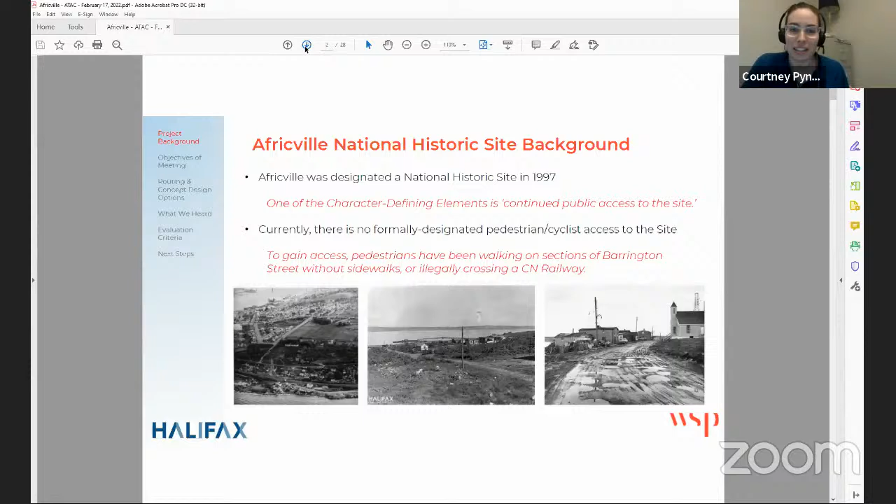How this project began was that it was initiated by an accessibility petition brought on by the Africville Museum. This petition recognized that there are currently no formal pedestrian facilities that connect the National Historic Site to the HRM sidewalk and the Halifax Transit Network. So this brought on the project by HRM, and they pulled us in to help out with the functional plan.

So what was our project, or what is our project? We were asked to look at connections to the Africville National Historic Site, broken down into 3 project phases. The first phase was to review the 3 proposed potential routes identified by HRM. We then determined the preferred route based on those 3, looking at the AAA lens—all ages and abilities—and its accessibility. And the stage we're currently in right now is preparing the functional design for the preferred facility.

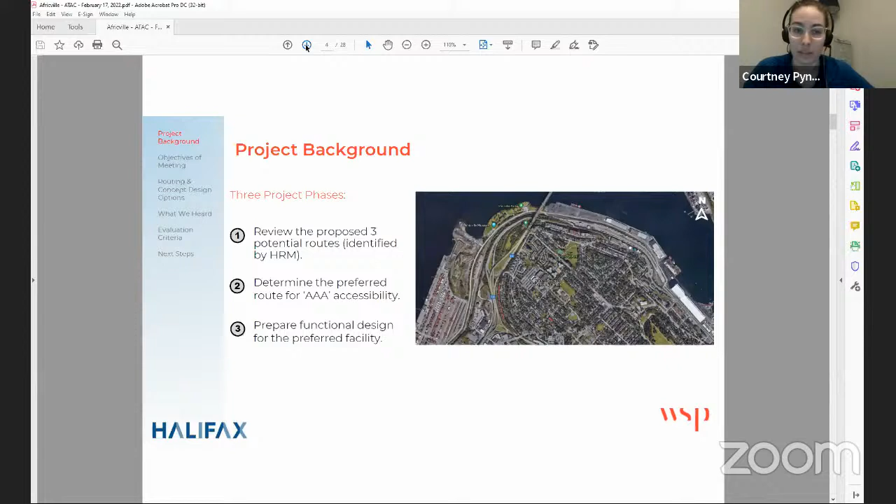So what we did is reconvene in December of 2020. Of course, we re-met with those external stakeholders, utilities, and property owners just to ensure we were up to date with any of their ongoing projects or information. So we really kicked the project back off at that point. We were able to complete our review of the existing conditions, develop those concept options, and then went to the public and re-engaged the stakeholder engagement group to gain feedback. We met with some advocacy groups in October, and also completed some community pop-ups and online webinars late October.

Why am I here today? Well, we're here to provide a project update, show and review the public engagement results that were received, get some feedback and comments from the group here today, and also let you know what's next for the project.

Those three routes we talked about before are shown on the screen here through A, B, and C. A is looking to build a connection from Niobe Gate through up to Barrington Street and then down through Africville Road. What we wanted to note here is it's fantastic to extend that connection on Barrington Street down to Niobe Gate.

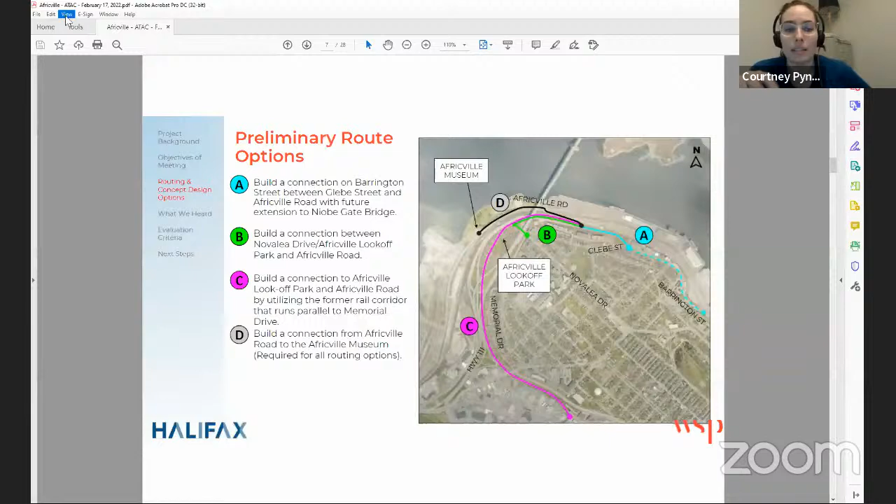Novalea Drive down through to the Africville Lookoff Park and then a connection through Africville Road. The third option, illustrated by C and in pink, is to build a connection to Africville Lookoff Park and Africville Road by utilizing the former railway corridor, which runs parallel currently to Memorial Drive.

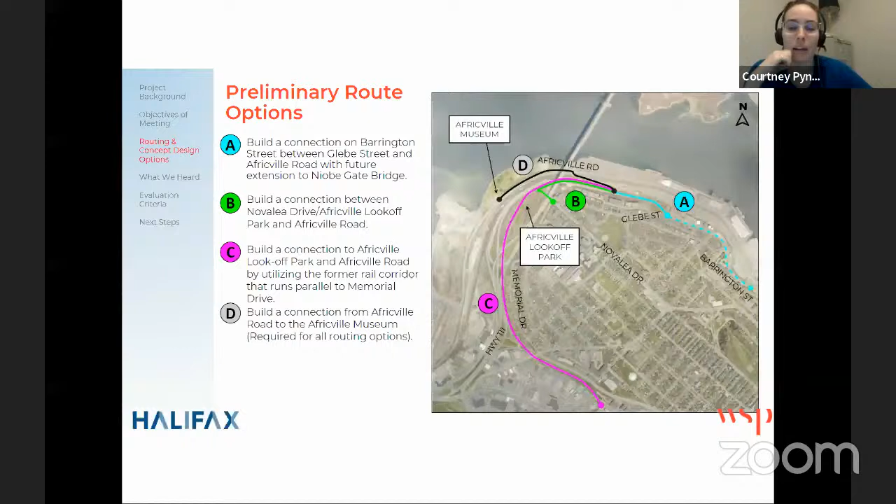One thing to note, D is in black because D is being looked at for all three options. So A, B, and C did include D for all those options. D is looking at building the connection from Africville Road through to the Africville Museum. Again, that was looked at in A, B, and C. It wasn't really a contender for an option—it was kind of guaranteed it was going to happen.

So after completing preliminary feedback from stakeholders, as well as looking at the different options and a general criteria list, we provided a recommended primary route to further look into in regards to design options.

What was selected is A, so that's building a connection on Barrington Street to Glebe with that future extension to Niobe Gate. And of course, Project D, which is building that connection from Africville Road down through to the Africville Museum. Since it's there and it's nearby and there's an opportunity here, we also wanted to flag Project B.

There would be an extension along the existing high track that's currently accessed by the MacKay Bridge—they currently have an access road there for access to their piers and their abutment maintenance. But we thought if that could be updated, it would be a great connection to the bottom of Novalea. One thing to note though, there's a very steep connection there from Novalea Drive down. So it doesn't meet that AAA lens, but it's still a great connection to complete that loop, so we wanted to include that.

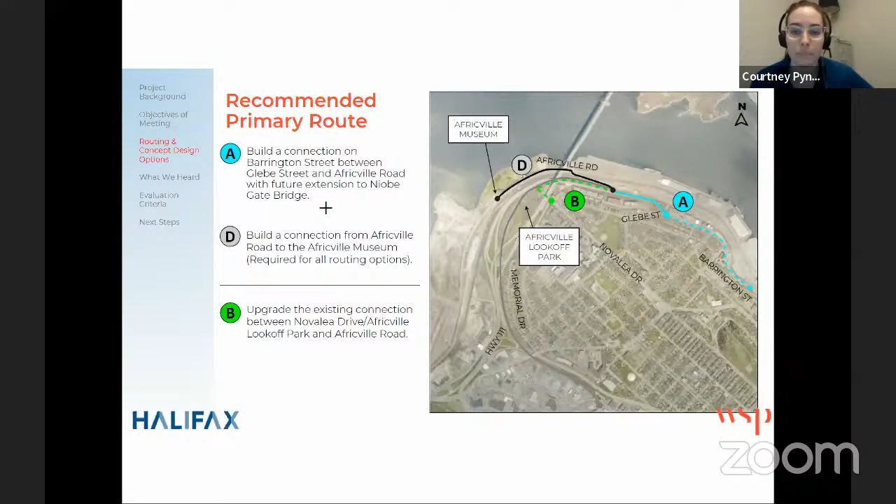Now we're really going to dive into and focus in on that Project A. We've selected Project A and D to further look into.

Now we're going to talk about three different segments here. Segment 1 is mainly focused in the Africville National Historic Site today. Section 2 is pretty much going from the parking lot there at Africville National Historic Site and making our connection up to Africville and Barrington Street. And then section 3 is going from that point at Africville and Barrington through to Barrington at that Niobe Gate location. So we're going to dive into each of these chunks now.

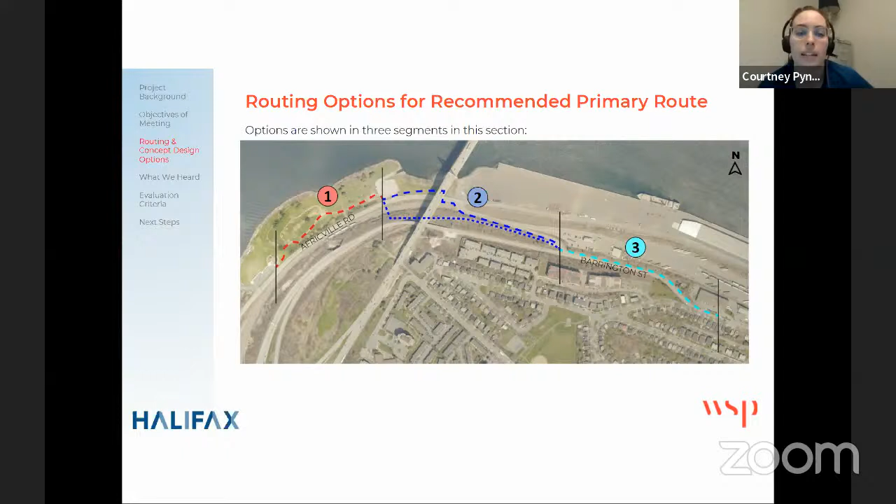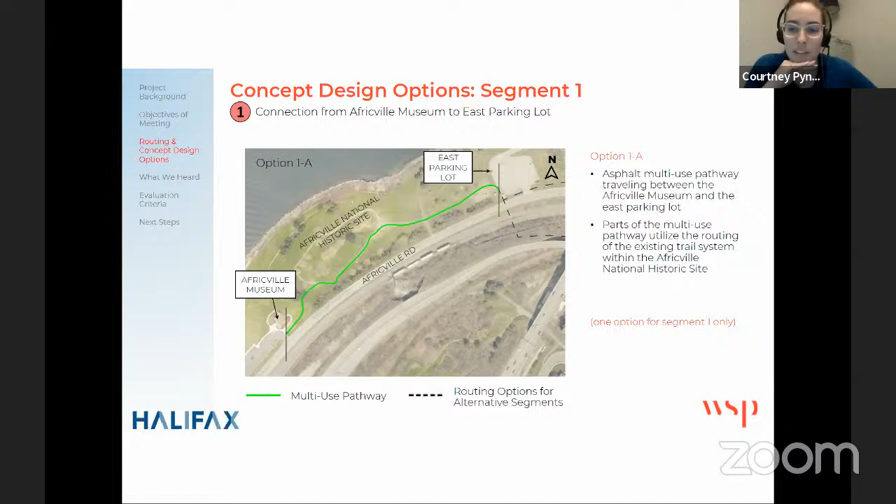So we'd love to have that 3 to 3.5 meter wide asphalt surface. That's a nice, comfortable size to allow for multiple users on this pathway. Also, it being asphalt allows for better winter maintenance and to be able to be cleared during the winter seasons and used. That's option 1.

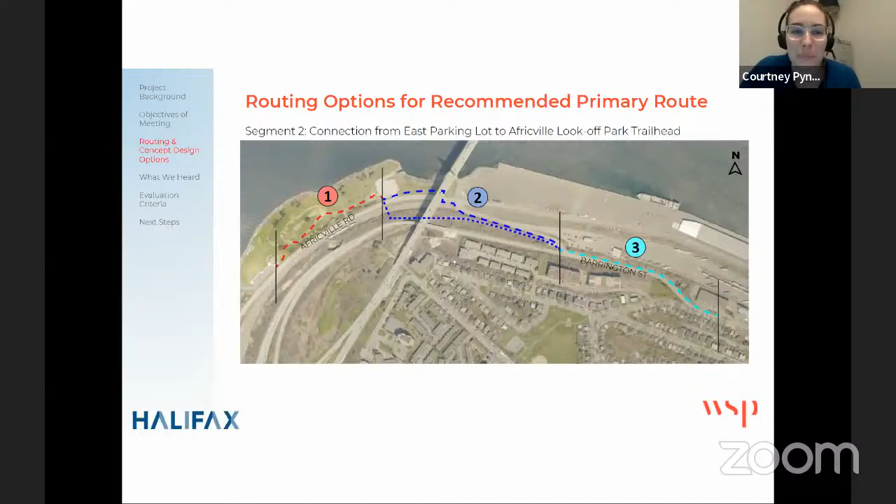So we're going to jump into option 2 now. Just a refresher, we're now in the middle here. This option, we wanted to look at a couple different options. So we looked at 2 different facility options with connection from the east parking lot up through the Africville and Barrington intersection. If you follow the green again, that's still a multi-use pathway facility, meaning an asphalt surface for all users.

What we're illustrating here is one would go from the east parking lot, that line there. Of course we're under the bridge here, so we're not crossing the bridge, we're actually under. We then would cross Africville Road at an at-grade crossing, meaning a marked crosswalk on the roadway. We then would have to cross the railway crossing there, so the CN track, and again that would be at grade. Then we make our way up the hill on Africville Road to connect into the Africville and Barrington intersection.

So that's option 2A. Option 2B is the exact same routing, however, once we cross the road there from the east parking lot, that would actually change to be a sidewalk facility. I'm sure people on this call are wondering, what do you mean, it's AAA, that's what the goal was. However, we did hear some feedback - they wanted to see a sidewalk option. So we wanted to ensure that we met everyone's comments and feedback there. That's why we're seeing the sidewalk option here.

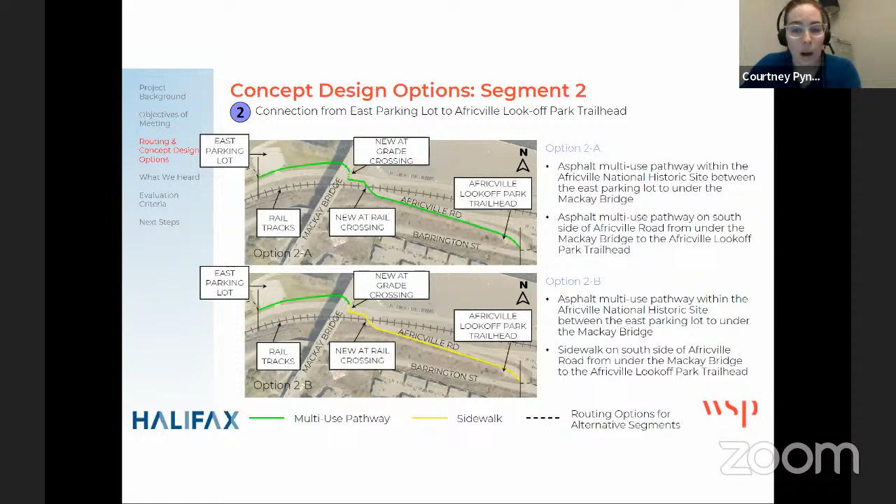We did look at one more option, which is completely different than these two options here.

Here are two cross sections that could illustrate what option 2A and 2B could look like. Again, option 2A, as you can see, is a 3 meter, if we could fit it a 3.5 meter asphalt surface, whereas option B here is illustrating that 1.8 meter sidewalk facility.

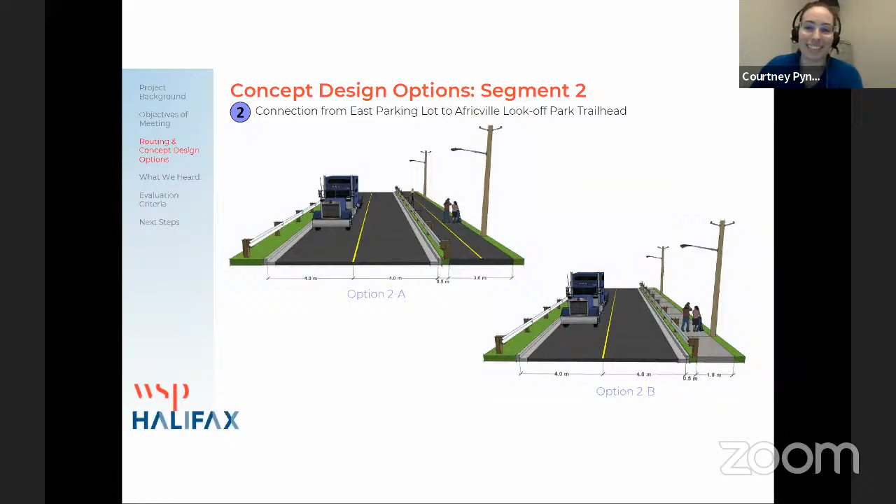Let me go to the next slide - it's option 2C. This option here is a little bit different than what you just saw. Again, starting at the east parking lot in the top left corner of the image, we actually would ramp up either on this side here or on the other side of the parking lot and actually cross both Africville Road and the railway at a separated crossing, meaning a bridge structure would actually cross over.

So similar to any pedways that you see or any other pedestrian bridge styles. What we're seeing here on the bottom of the page is just an example of what that AT bridge could look like. But essentially what it means is that we're crossing both the roadway and the tracks above, so we're not at grade.

So to do that, we're able to actually use the high track. The green line there, proceeding after you cross the AT bridge and make your way over to the Africville Road and Barrington Street intersection, we're actually utilizing the old high track there. So it's currently a little bit more of a footpath. I did mention that the MacKay Bridge maintenance vehicles do use this roadway for access to the piers and their abutments for maintenance, but this area here could be upgraded accordingly with the asphalt surface multi-use pathway for use by both our active transportation users and maintenance vehicles as needed.

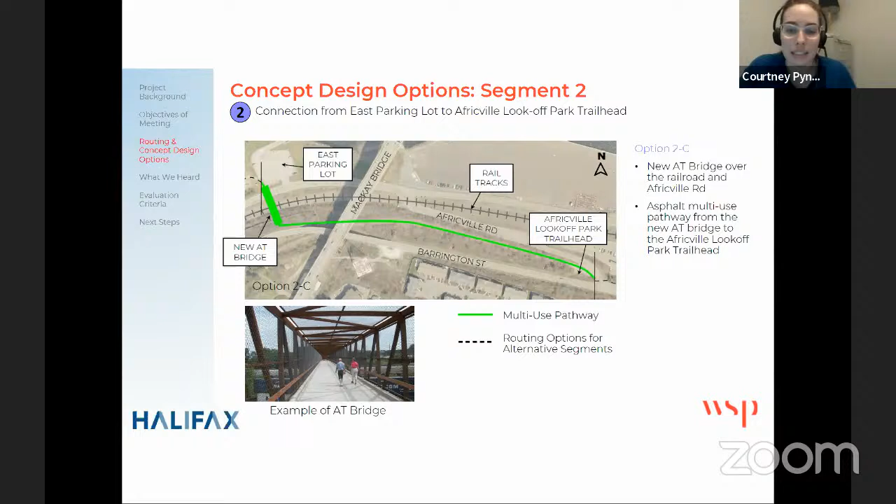On the next slide here, we'll see a cross section again, illustrating that 3 to 3.5 meter wide asphalt surface. That is our main goal for this. As I mentioned before, the asphalt will be easier to maintain in the winter months.

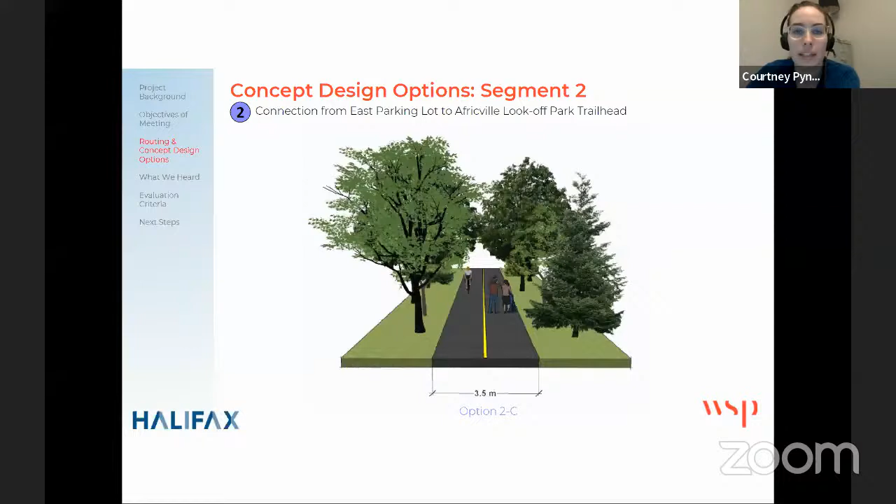Next slide, so just another view. We've gone through option 1, which was through the park. Option 2, we made our way up from the east parking lot through to Africville and Barrington Street intersection. Now we're going to go from Africville, Barrington Street intersection through to Niobe Gate there and see what our options are.

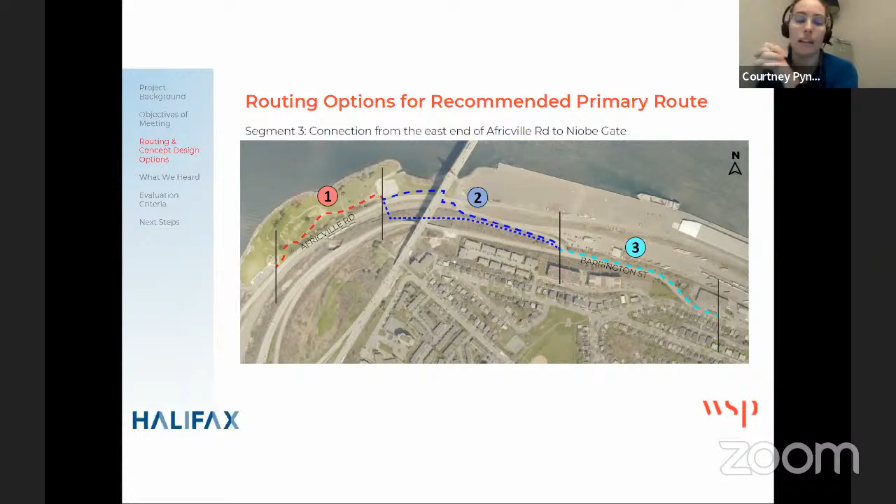Next slide. Perfect. Similar to what we just saw for option 2A and 2B, we have that same option here for 3A and 3B. So 3A is focusing on having a multi-use pathway on the water side or the north side of Barrington Street. To do so, coming from the previous facility, we'd have a marked crossing here to cross Africville. We then would continue on the north side of Barrington Street and make our way down to the nearest transit stop, which is identified there.

And at that location there, we'd have another marked crossing. However, this one would be crossing Barrington Street to connect into the existing sidewalk facility. The exact same routing is done for option 3B, however instead of it being a multi-use pathway, it'd be a sidewalk facility. Again, it was just asked for early in the engagement to see the variety of facility types, and that's why we're seeing both options here today.

One thing to note is that we did hear that it'd be great for option 3A or 3B, but 3A would make the most sense to actually be extended down to Niobe Gate to connect into the Barrington Greenway. So that is what we heard, and we'll be reflecting that in our report.

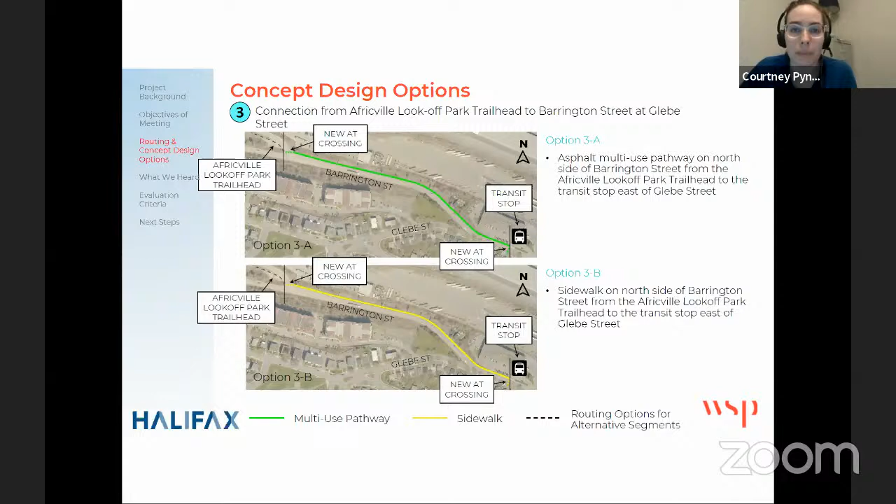Here are some examples of the cross sections of what that could look like. So you have your two lanes on Barrington, and you'd have your multi-use pathway on one side, or the option of a sidewalk.

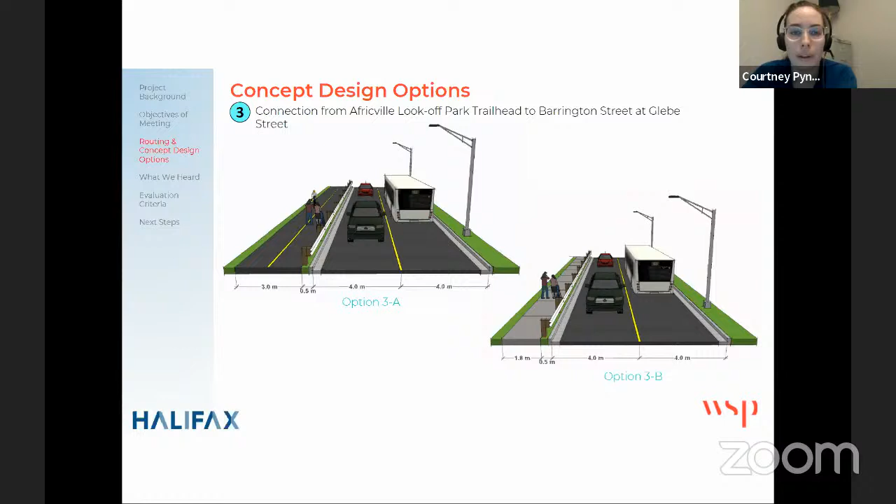So again, I just wanted to touch base on that. Remember how I mentioned that we had option B tagged into these two options here that we're recommending? The reason is that if option 2C, which is that bridge AT crossing, is selected, as you can see, the black dashed line on your screen illustrated by option 2C actually has a connection to the high track that extends into the Africville Lookoff Park. It's currently like a footpath, and sometimes can get muddy and full of water.

However, there's already a path there that we might be able to improve. This section may be a crusher dust pathway, or it might be able to get paved and maintained through the winter. As we can see here from Novalea Drive down into the Africville Lookoff Park, it's illustrated by a black line, just more so illustrating that's an existing pathway, and it actually is a gravel surface. So if we could, it'd be desirable to have that green as a paved or asphalt multi-use pathway.

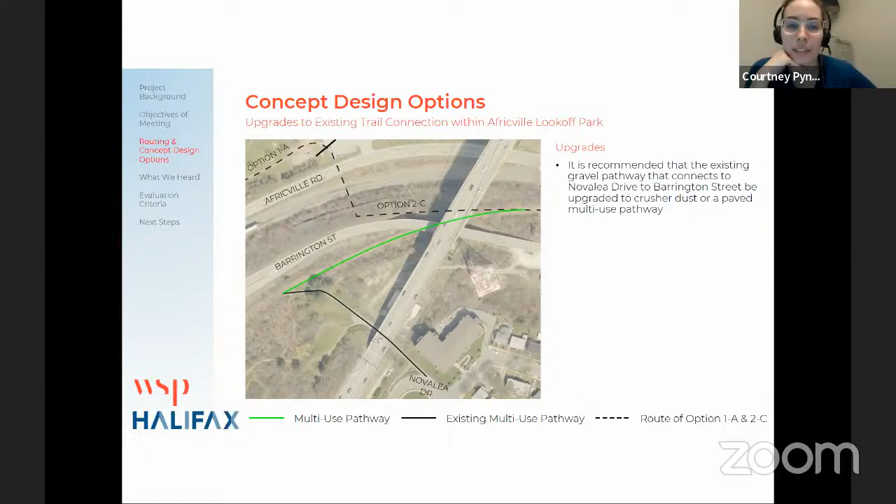So as I mentioned, we did go to the public, and we had some great turnout. We had 284 participant submissions, broken down through the Shape Your City submissions. We had some dedicated questions and comments through the webinar, some engagement written comments there through a pop-up, and there were a couple emails sent off to Megan at HRM.

A couple things — I'm not going to read everything on this page, there's actually a second page here, but the main thing we heard from the public is that there is still a need for public transit to get to the Africville site. They want to ensure that the facilities being built are accessible for persons who utilize mobility devices. The need for access from the Africville Bridge to the Bedford Highway connection, the Windsor Street Exchange project, was brought up, and that is a nearby project that's on the go.

There were some comments here about this potentially providing an opportunity to revitalize the Africville Lookoff Park and enhance it further with easier connections being made. There's some concerns about Route C, which is that high, probably former rail line, about privacy concerns. And one comment was the need to have the route removed as much as possible from bridge access lanes and ramps, to get it away from vehicle traffic and have more of a greenway feel.

So what we did here in general is that the recommended primary route that was presented, which is A, with a potential combination of B and D, was actually 75% agreed that this is a great option to continue looking into.

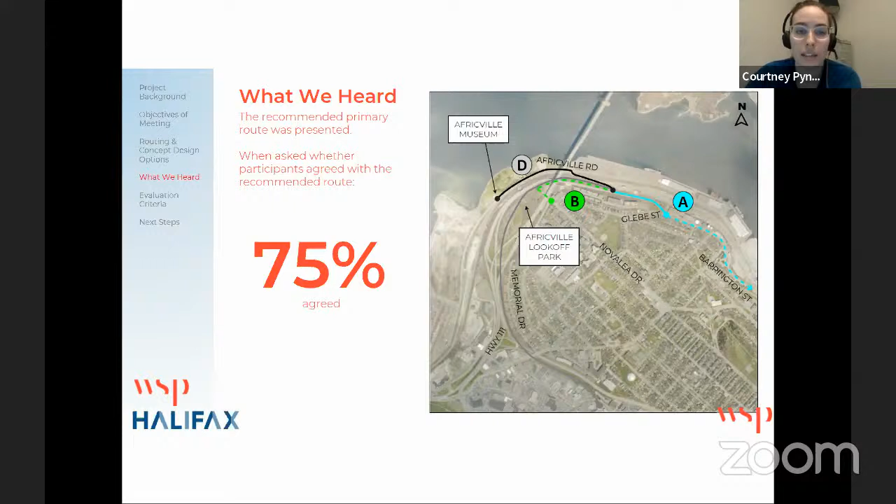This is a quick snapshot breaking down those options we just reviewed, so option 1A, 2A, 2B, and 2C, and then 3A and 3B at the bottom here. Essentially this is showing us what the public was more happy with, or more satisfied with, in regards to the options. At the very top, the light green and dark green illustrate that 69% were satisfied with the proposed option for option 1.

What we saw for segment 2 is actually option 2C, which is that AT bridge crossing, and then that greenway path along Africville being removed from Africville Road, was actually quite well received as well, with around 60%. And then for segment 3, the multi-use pathway option from the Africville-Barrington Street intersection through to Niobe Gate was most preferable, with close to 65% satisfaction.

This is a quick summary.

What we heard, as well as based on the preferred concepts, is that we'd have a multi-use pathway facility that would continue from the Africville Museum down beginning at option 1. We would then have a separated AT bridge crossing to cross Africville Road and the CN tracks. It would continue as a multi-use pathway and more of a greenway feel off-road, and then we would connect into Barrington Street on the northern side with the multi-use pathway with connection down to Niobe Gate.

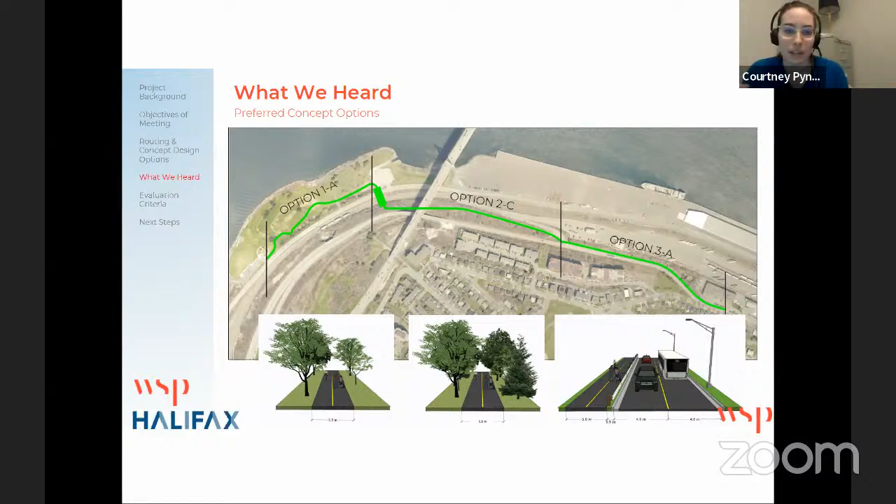So our next steps here are completing our evaluation criteria for all these options to further detail how we came to the preferred option that was selected. Some of the feedback we'll see in the report itself will be the connectivity and directness that we compared for these options, the comfort for the active transportation users, safety and accessibility, and the impacts both to traffic, transit, and rail in this case, utilities and property owners.

We took into account public and key stakeholder feedback response. We did meet with HRM's internal review committee, the technical committee, to gain their feedback as well, and we're also taking into account cost and ease of implementation. So all those options will have a more broken down evaluation and ranking of how we came to the preferred option. Next slide.

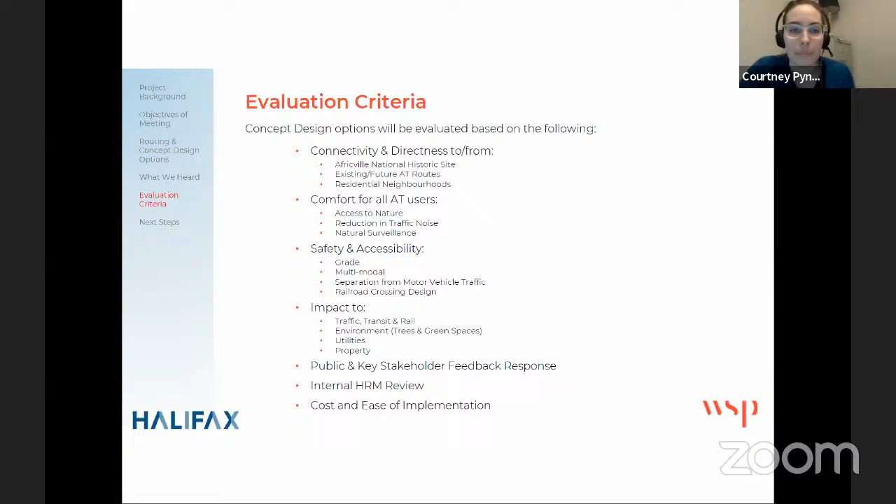I am here presenting at the ATAC meeting in February of 2022. Our next steps: we've received the feedback from the HRM internal committee, we have our public feedback, and we'll be gaining feedback from you folks today on this call. We're currently proceeding and moving ahead with the facility of 30% design based on that preferred option, which is that multi-use pathway connection through.

Our goal right now is to have something in draft format to send over to Megan and HRM's team in March. Depending on when we receive those comments, we'll wrap that up into a final report, hopefully March, maybe April, since time is flying on us. That's everything - I tried to get through it because they told me I had 10 minutes. I'm sure I've gone past that, but I'm here to answer any questions.

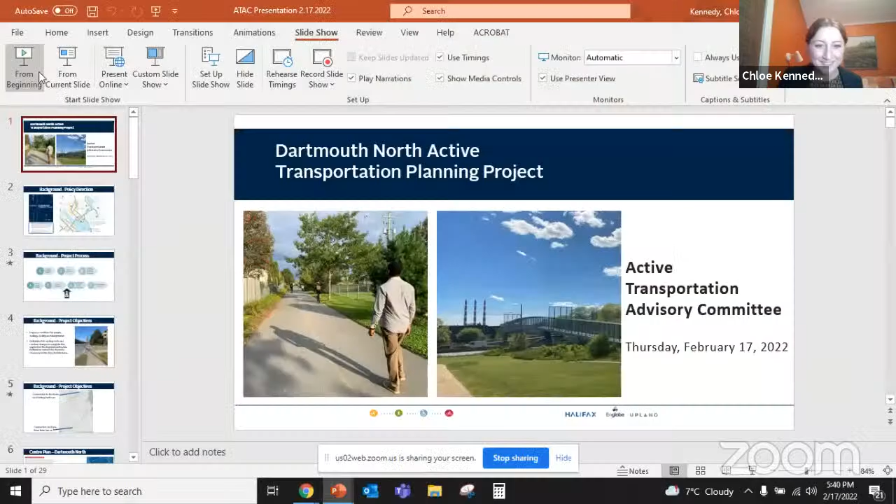As you mentioned, my name is Chloe Kennedy, and I'm an active transportation planner with HRM. I'll be presenting on the Dartmouth North Active Transportation Planning Project, which I've been managing for about a year now. This project was launched in February of 2020, but because it relied a lot on in-person engagement, when the pandemic hit in the spring of 2020, it was deferred for a year, and there was also a bit of a staff changeover. So I've been working on this since the spring of 2021.

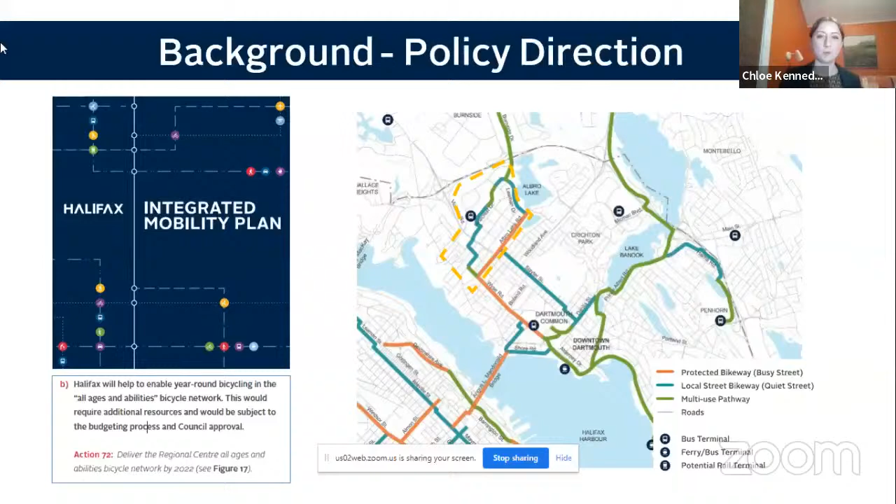As some of you may know, the Integrated Mobility Plan provides direction to staff to deliver the Regional Centre All Ages and Abilities Bicycle Network. So this section outlined in yellow is the subject of this planning project, a cycling route that's going to go through Dartmouth North as part of the AAA network. To give you a sense of where we are, in the spring of 2021, when I first started on this project in partnership with Englobe and Upland Planning, we conducted an existing conditions report, looking at survey data, traffic analysis, and things like that.

And then we conducted phase 1 engagement through the summer of 2021, through July and August. Based on the feedback we received from phase 1 engagement, we developed some route options, cross sections, intersection diagrams, as well as an evaluation framework in consultation with stakeholders.

Then through November, and luckily early December, we just squeaked in right before Omicron hit, we finished phase 2 engagement, where we took those options back to the public and to our stakeholders to get feedback, and completed our evaluation of the corridor options. So that leaves us here as we work towards 30% design of our preferred corridor improvements.

Sometime this late spring, early summer, we'll be putting a recommendation into council. We just completed our second of 3 technical committee meetings where we had the route approved internally. So now we're moving towards having more detailed meetings with transit and parks to really firm up our facility types and work towards the design of our preferred route. So I'm excited to share that with you today and to get feedback at this exciting stage in the project.

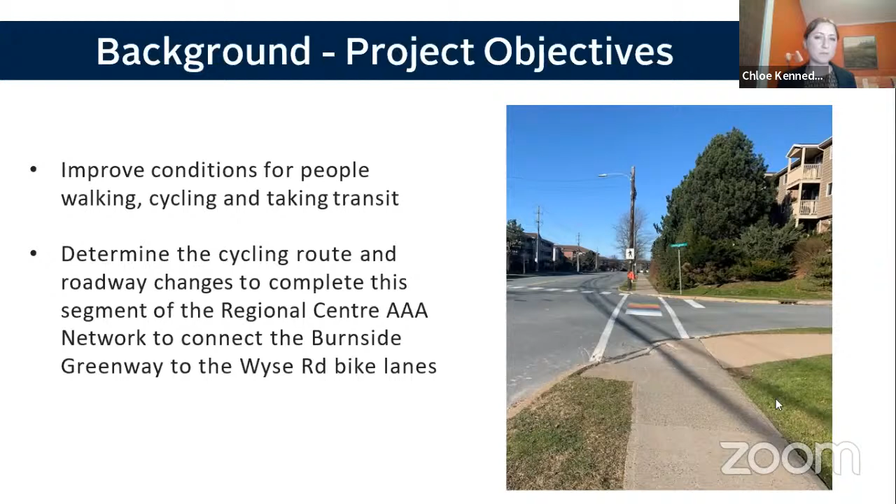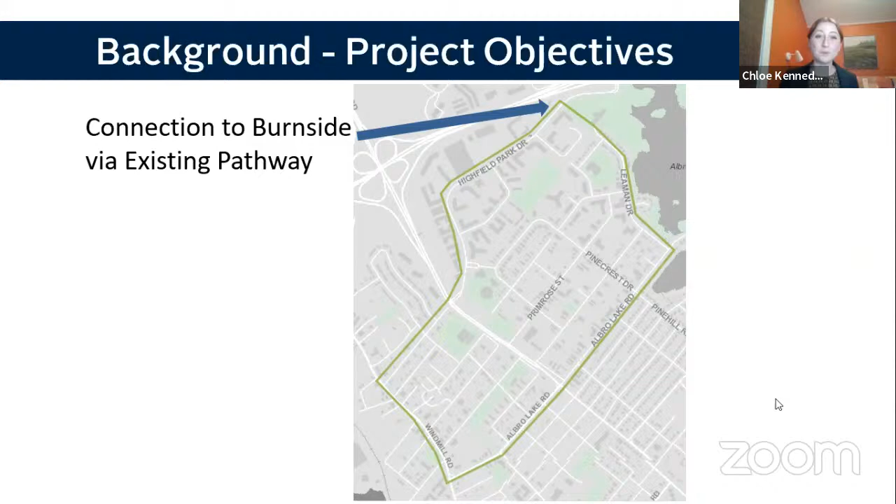To help you visualize what we're looking at, there's currently a multi-use pathway that joins the Burnside Industrial Park to North End Dartmouth, and that pathway ends right here where the blue arrow is pointing, on Highfield Park Drive. And just as of fall 2021, we now have new unidirectional bike lanes on Wyse Road that end at Albro Lake, shown here with this blue arrow. So the goal of this planning project is to create a new cycling facility that connects these two pieces of existing active transportation infrastructure.

To characterize the roadway a little bit: if you're on Victoria Road heading outbound or north, after Albro Lake, Victoria Road goes from one travel lane in each direction to two travel lanes in each direction, and Victoria Road does experience some fast traffic. There's one signalized intersection at Primrose, between Highfield and Albro Lake. The streets on the east and west side of Victoria Road within this green boundary area are primarily local streets, made up of single detached houses and a lot of multi-residential units, especially up through Leaman, Primrose, and Pinecrest.

And then taking a look at Highfield Park Drive, if we were to turn right and travel up here, Highfield Park Drive also has a high number of multi-residential complexes, but also a lot of mixed commercial — so it's got a shopping district and some restaurants, also a community center, library, and John Martin Junior High.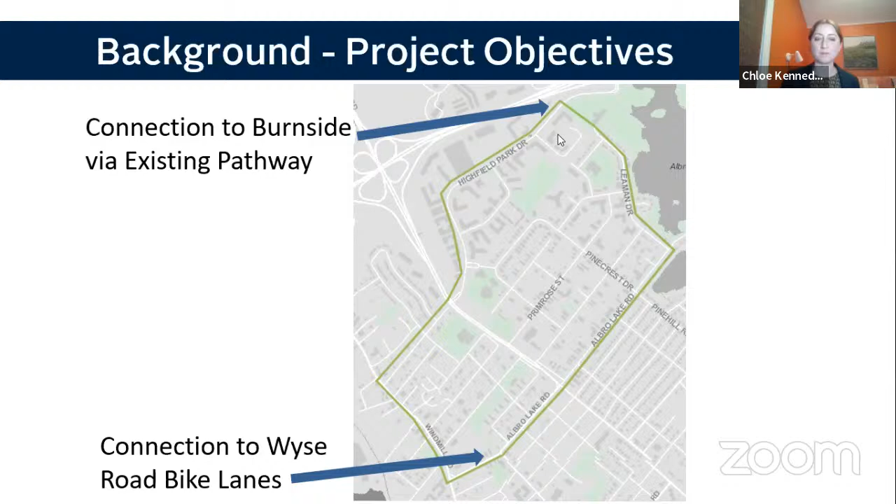Because this area of Dartmouth is within the regional center, it's an important part of Halifax's center plan. It was identified in Package A of the center plan as an important center with a strong community hub, but it was noted that the current network and block pattern isolates the center from the surrounding community, and that future vibrancy of this center will require easy access for pedestrians, cyclists, and transit users. So it's definitely in need of some upgrades on that front.

Additionally, Victoria Road between Primrose and Albro Lake received corridor designation in Package A of the center plan. It was noted that north of Albro Lake, this corridor becomes an extension of Highway 111 and does not include adequate and safe pedestrian infrastructure or safe crossings.

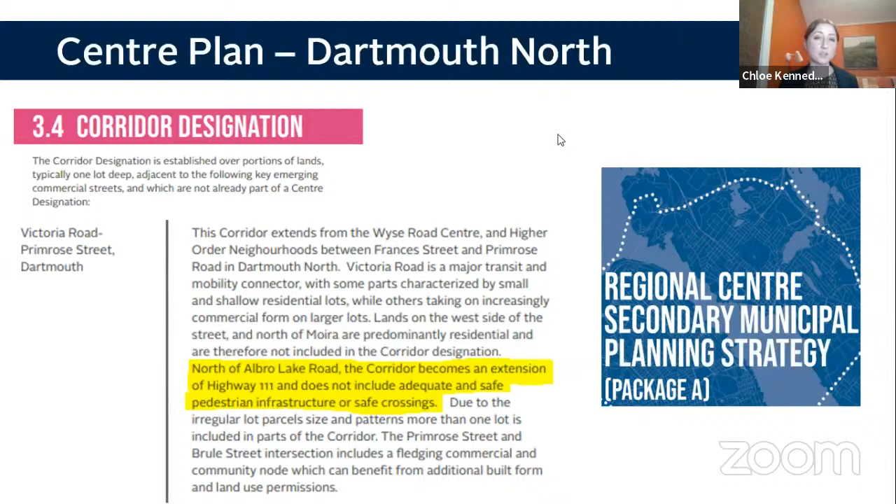From an equity standpoint, it's important to ensure that residents who don't have access to personal vehicles still feel as though they have safe crossings and can travel safely through their neighborhoods.

As we initiated this project in the spring and throughout the project, we connected with a lot of community organizations that have done great advocacy work to improve conditions in Dartmouth North and contribute to the vibrancy of the neighborhood.

We connected with the Between the Bridges group in Dartmouth, who hold regular resident roundtable discussions to bring forward issues in the community. We met with them to talk about current conditions and consult on our concepts.

We also met quite extensively with the Islamic Association of Nova Scotia at their mosque on Leaman Street, which is a regional hub for the Islamic community. We were able to get their feedback and hear their concerns on travel through the neighborhood.

Also, the North Grove Community Food Hub is located on the corner of Primrose and Victoria. They offer a lot of different community programs and a community kitchen, and it's an important part of that community hub on Victoria Road.

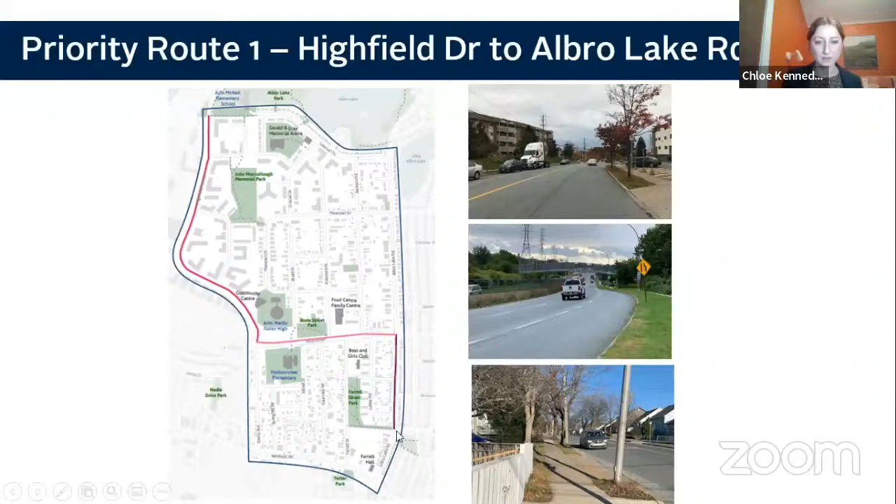Just before I get to our feedback on these routes, I'll run through them quickly. The first priority route travels from the existing Burnside Greenway down Highfield Park, addressing issues with a separated cycling facility, then travels along Victoria Road and down Albro Lake to connect with the Wyse Road at Albro Lake bike lanes.

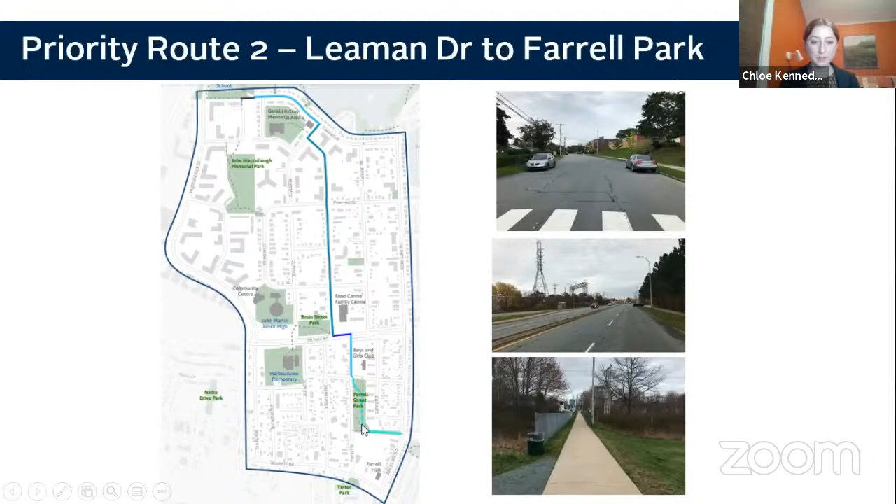The second priority route, instead of coming down Highfield Park, goes down Leaman Street and takes a straight shot down Primrose. This route introduces a new signalized cycling and pedestrian crossing at Victoria and Farrell Street, comes through Farrell Park, and then down the existing walkway to Wyse at Albro.

The third priority route, zoomed in a bit here so you can see better, is a network of local streets: True North Crescent, Farthington, Crystal, Pinecrest, and then this route would have people use the existing pedestrian overpass on Victoria Road. This would involve traffic calming on local streets so that cyclists could share with traffic.

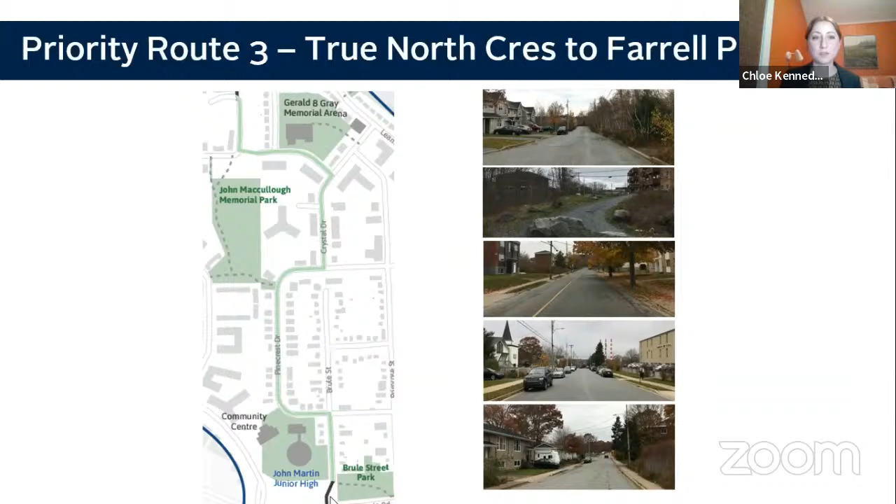For phase 2 engagement, which we just squeaked in late November, early December before Omicron really took hold, we took these 3 routes and also some intersection diagrams and cross sections back to our stakeholders and to the public to get feedback on the pros and cons of each segment of these routes.

We also did a lived experience focus group with the Between the Bridges Roundtable, and of course we had our surveys and pop-up events. We did presentations to the junior high and the Islamic Association at the mosque, and just to let folks know this was happening, we did a mail out promotion.

We mailed out 5,100 letters to folks in the neighborhood. It's very densely populated with all the multi-residential units, so it was quite an extensive mail out, but good to let everyone know that it was happening and how they could provide feedback. We also installed a few art bikes around the neighborhood with the Shape Your City link, just to let folks know what was happening and how they could provide feedback.

Moving on to the feedback that we received on the priority routes. This route was the preferred route in terms of connectivity and directness for cyclists.

What we heard from residents of Dartmouth North is that Highfield and Victoria especially were their preferred routes in terms of eyes on the street. After dark, there's still busy roads, they're well lit, so there's more of a feeling of security for pedestrians and cyclists. Bidirectional bikeways were suggested for Highfield Drive and Victoria Road where possible.

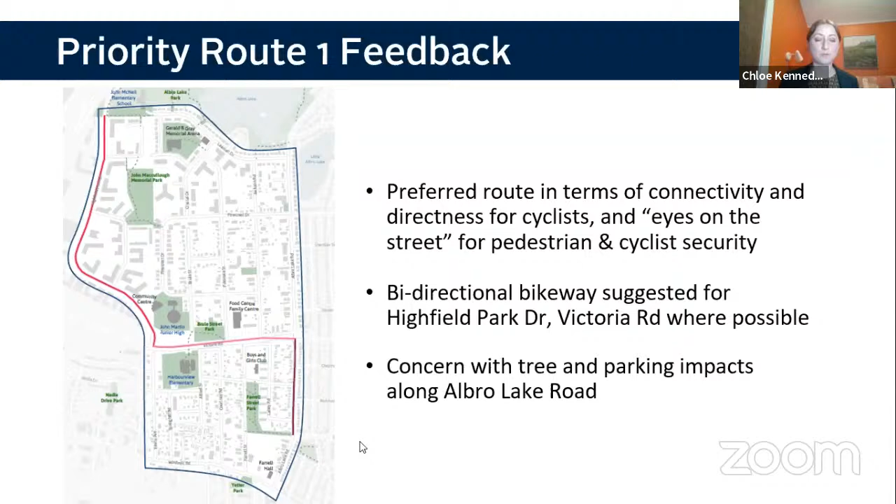For feedback on the second priority route, this one comes down Leaman and Primrose. Leaman had a lot of concerns, especially from the Islamic community, that the removal of parking on one side of Leaman would negatively impact access to the mosque. It is a regional faith center, so you do have a lot of folks accessing the mosque by vehicle.

Also, Primrose Street was not preferred, even though it's a pretty direct route through the neighborhood. There's a bit of a steep grade at Pinecrest, so that wasn't a preferred option.

But the lower half of this route, the Farrell Street crossing at Victoria, received a lot of overwhelming positive feedback, as it was seen to greatly improve pedestrian and cycling access to the North Grove Family Food Center, which is right across the street, the Boys and Girls Club on the west side of Victoria Road, and the park. There's some recreational courts and 2 transit stops on either side of Victoria Road with no crosswalk in between them currently.

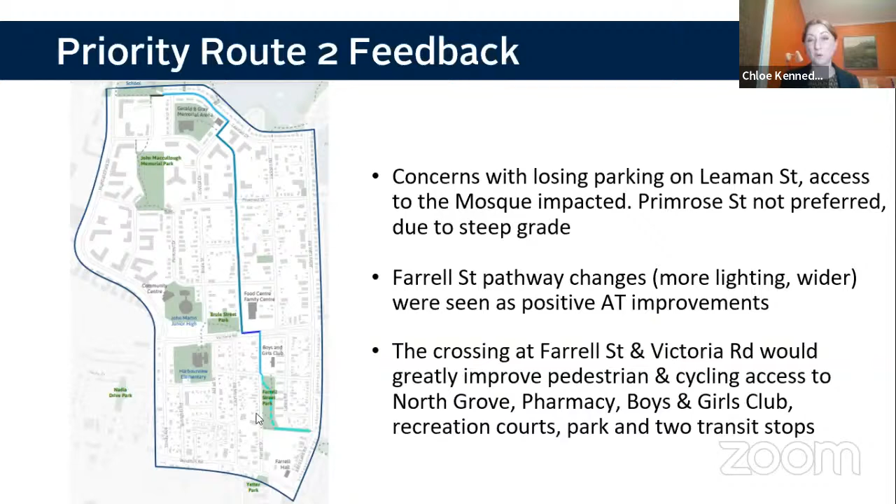The feedback we received on the third priority route, this is the one that kind of wound through some residential streets. This was seen to be the best improvement for local streets and great for pedestrians, but it wasn't the preferred route in terms of cycling because it was seen to be a little indirect and difficult. One resident referred to it as a ball of yarn, but we did receive a lot of helpful feedback for street improvements to make it safer for pedestrians in terms of more lighting, traffic calming, and that kind of thing.

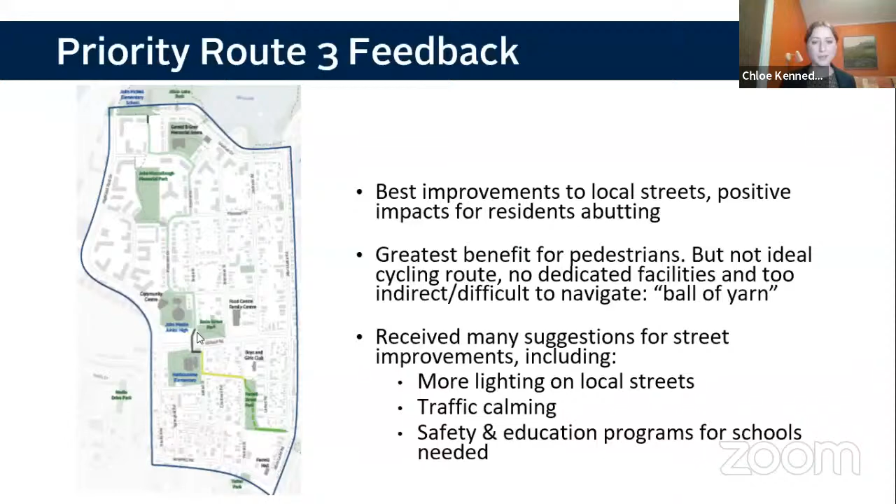So through January, we completed an evaluation of the routes based on the results of the What We Heard report, which is available on our Shape Your City page, and also based on our evaluation criteria, to come up with our preferred route.

And the preferred route is a combination of Route 1 and Route 2. So this is what our preferred route is for the AAA network. Instead of going up Albro Lake Road from the corner of Wyse Road at Albro, we're going to go through the Farrell Street Pathway, through Farrell Park, up Farrell Street to that corner, and we're going to introduce a new signalized pedestrian and bike crossing at Victoria Road, travel down Victoria, and then up Highfield.

In a few minutes, I am going to share some suggestions that we will be taking forward to our design engineers for improvements to some of these local streets. Because as I mentioned, we did get a lot of robust public feedback on Pinecrest and Brule and some Complete Streets improvements. So even though those won't be the subject of our AAA segment, we're still going to be taking forward that feedback for improvements.

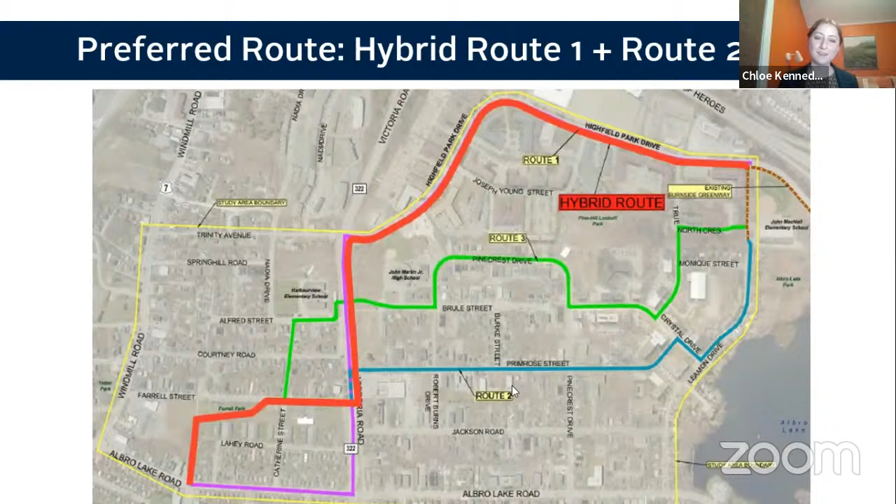Just to finish off, we're going to look at each of these segments in a little bit more detail, and then we'll finish off with some comments and questions.

At the corner of Wyse Road and Albro, we have the Farrell Street Pathway. This is a photo of that pathway. We had a lot of suggestions for improvements, including better lighting. Currently the lighting is affixed to a utility pole, so it's quite high up. We could have more human scale neighborhood lighting, fence upgrades, and the addition of a bidirectional bikeway beside the existing walkway. That was our preferred option.

We do still have some internal meetings to have with our colleagues from parks, parking and traffic, just to firm up what our facilities would look like, and then do a final round of consultation.

Coming up Farrell Street, this is what the crossing on Victoria Road currently looks like. There's 4 lanes of traffic, 2 in each direction, and 2 transit stops that currently don't have a sidewalk. So if you were coming up Farrell Street, you'd have to go about 70 meters the wrong way to Primrose and then 70 meters back. So you do see a lot of folks running across here.

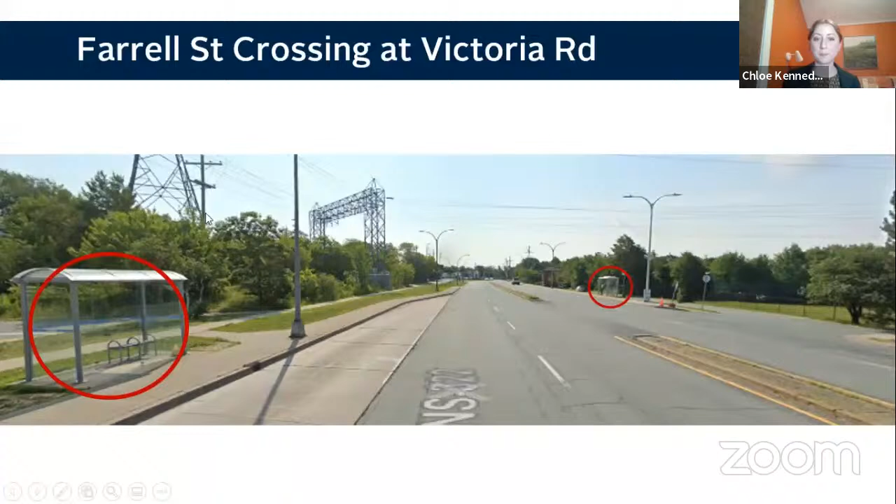This is a bird's eye view of what this new crossing will look like. We've suggested widening the pedestrian median and pinching these travel lanes so that the crossing distance is shorter. We have meetings upcoming with transit to talk about the impacts on any transit stops, the lay-by area here. But at this point, this is the preferred crossing that we have.

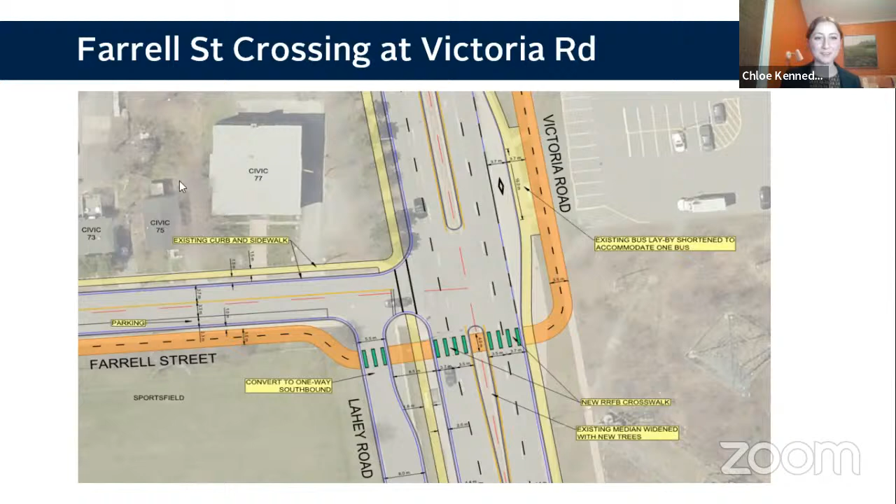Traveling along Victoria Road after that crossing, it's an arterial street with 4 travel lanes. There's no on-street parking that would be impacted. The suggestion moving forward is the addition of an AT facility beside the existing sidewalk, so we could have a bidirectional bikeway that would extend the length of Victoria Road north until it intersects with Highfield

Park Drive, sorry. This is a bird's eye view of that Victoria Highfield Park Drive intersection. We received a lot of feedback on this intersection during public engagement. We learned that a lot of school children and families cross from Trinity Avenue, which is this little cul-de-sac here. They'll make the crossing across Victoria and then up to John Martin Junior High. You can see the ball field here as part of the school grounds.

Currently there is desire to have a longer signal time for pedestrian crossings. Our project is proposing to remove this right-hand turn lane to make room for our AT facility to make that corner. That would also shorten the distance that pedestrians and cyclists have to cross the road, combined with lengthening the signal time. That would really improve access to this important community center with the library and the school, from the neighborhoods to the west of this area.

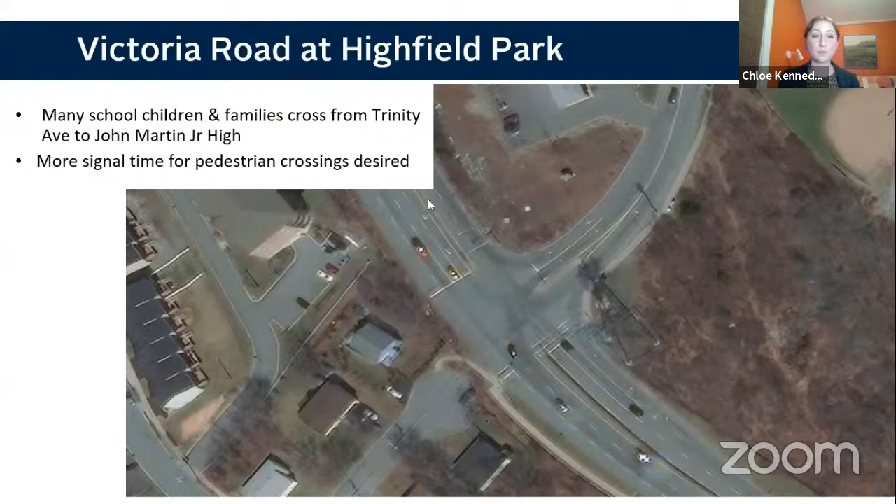So once we go up Highfield Drive to make that connection to the existing multi-use pathway at Burnside, Highfield Park Drive is a minor collector. It currently has on-street parking. Bidirectional bike lanes were suggested along the south side of the street, which would have some parking impacts. Any parking impacts on Highfield aren't anticipated to be a problem since the multi-use buildings do have dedicated parking lots, as do all of the commercial centers along Highfield Park Drive.

There are some upcoming projects being undertaken by transit and strategic transportation planning, so there's some exciting integration opportunities with our project moving forward. We still have to have some meetings with our internal colleagues to firm up exactly what this will look like on Highfield Park. But bidirectional bike lanes was certainly a preferred option.

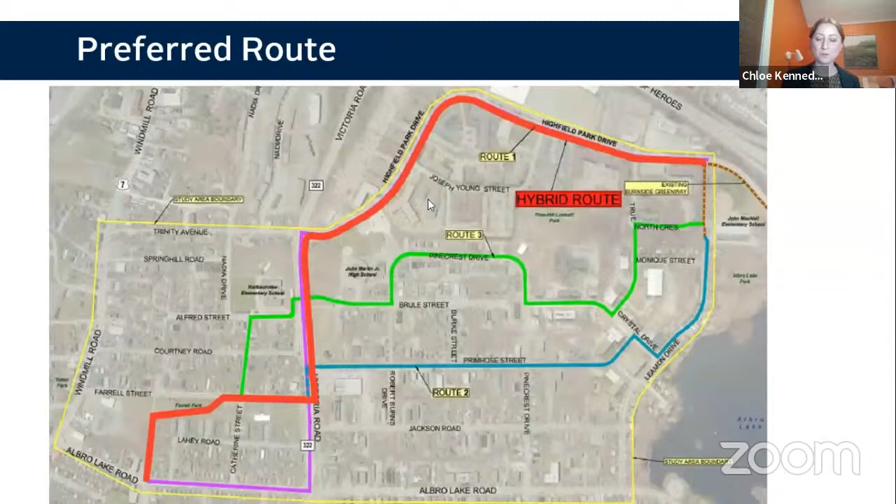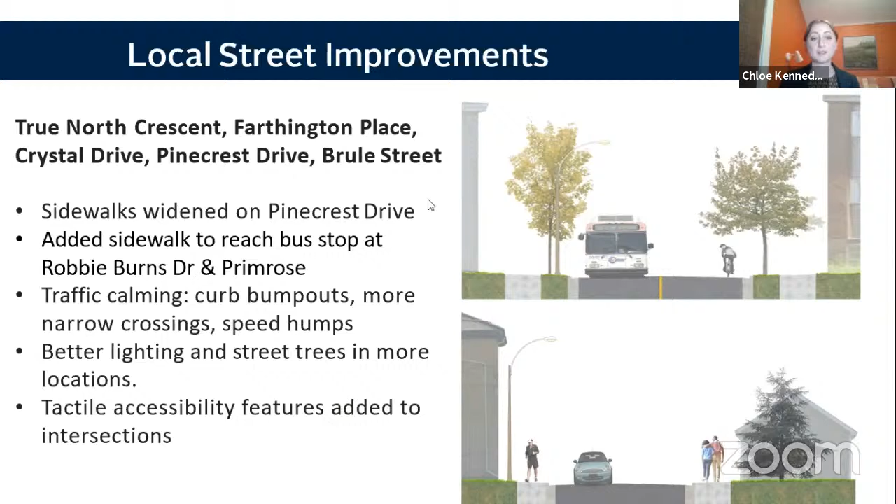So that's a bit of an overview of our preferred route through Dartmouth North. We do have local street improvements that we'll be putting forward in our report. Some examples would be widened sidewalks on Pinecrest Drive, also adding a little sidewalk section to reach the bus stop at Robbie Burns and Primrose. We heard a lot of desire for traffic calming through the streets listed above, including curb bump outs, narrow crossings, speed humps, better lighting, street trees, and more accessibility features.